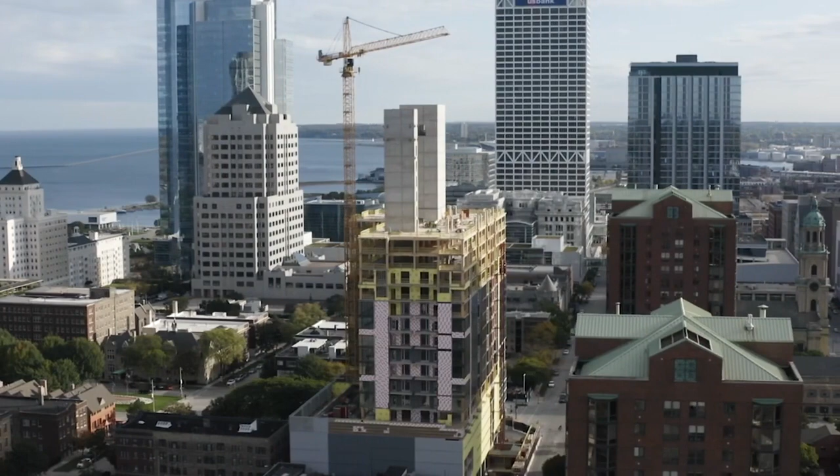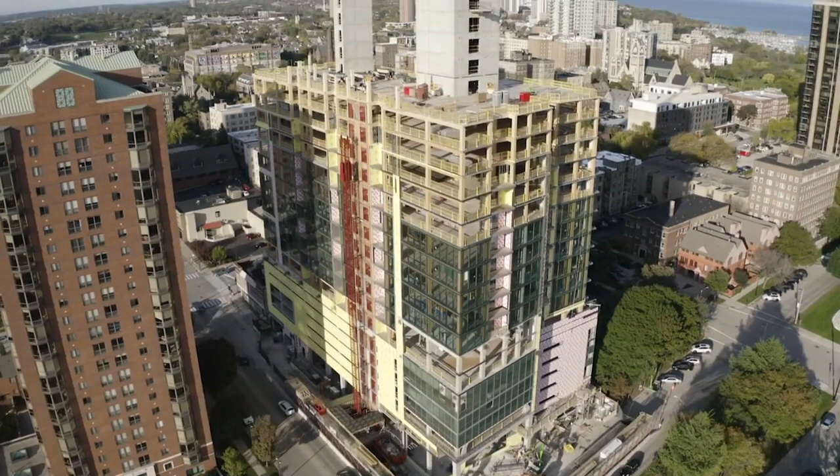In downtown Milwaukee, Wisconsin, a new luxury apartment building is rising in the upscale East Town neighborhood. The project is called Ascent, and to most passing by, it probably looks like a typical high-rise construction site. Turns out, it's anything but. To say it's very unusual is a massive understatement. Tall buildings like this are usually built out of steel and concrete, but this one? It's being built mostly out of wood.

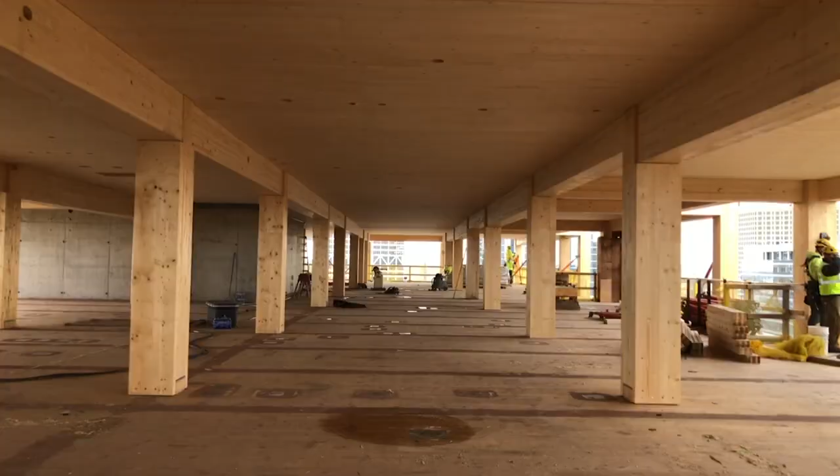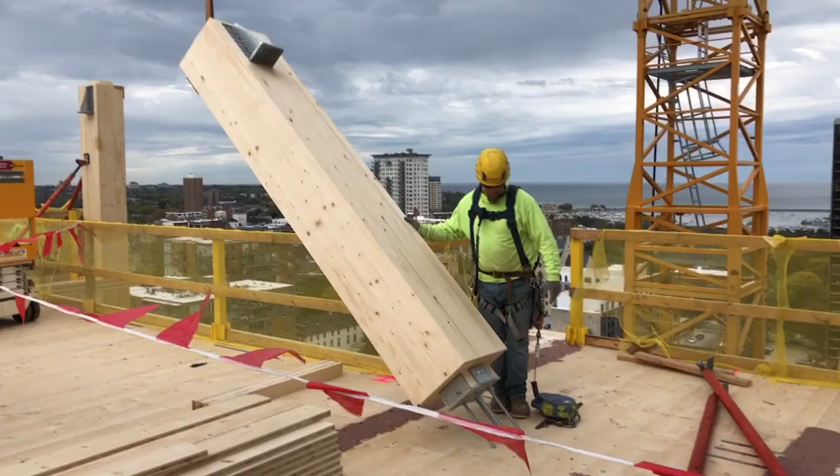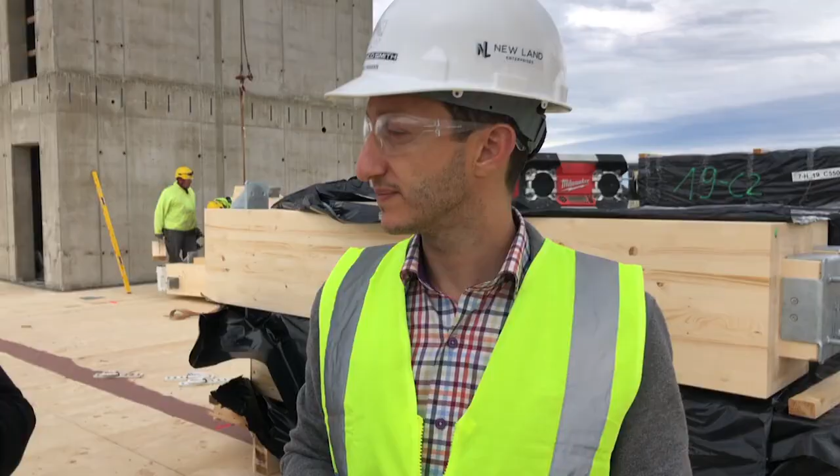How unique is this project here in the United States? Oh, it's unprecedented from an approval standpoint, from a fire testing standpoint, from a design and engineering standpoint. There was so much innovation in this project. Tim Gokhman is the managing director of New Land Enterprises, the development company behind Ascent. Building it out of timber was his idea.

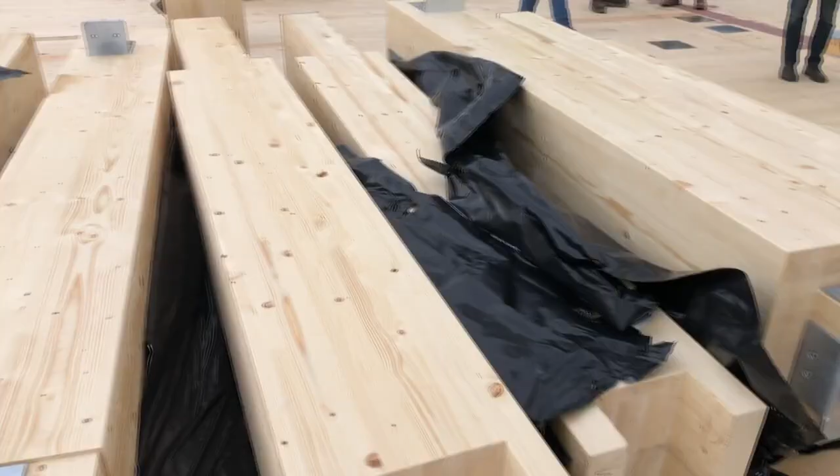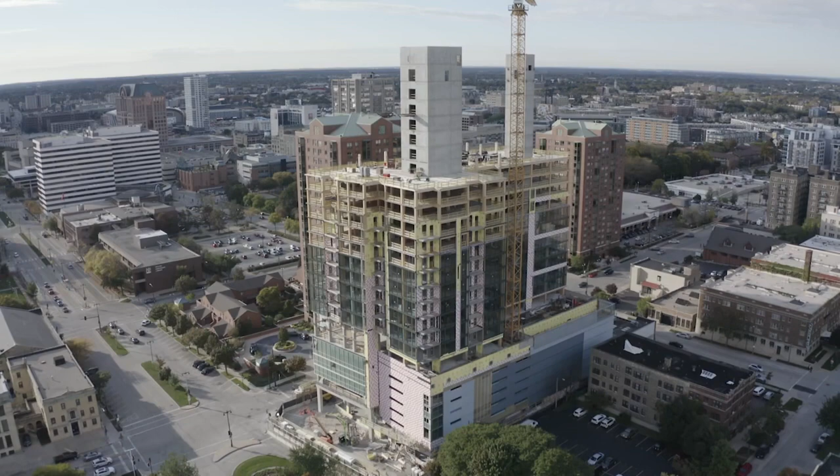Constructing with wood isn't new. We've been doing it for eons. But this uses a new technology called massive timber, or mass timber for short. Mass timber, which is surprisingly fire resistant, has made it possible to construct wood buildings that are larger and taller than ever before. In fact, when the 25-floor Ascent building is completed next summer, it will be the tallest structure of its kind in the world.

What made you say, I want to build a high-rise out of timber? Once you go into a building that has exposed wood, you understand right away. It's beautiful and you feel great in it. It is fast, it is precise, it is light, it is clean.

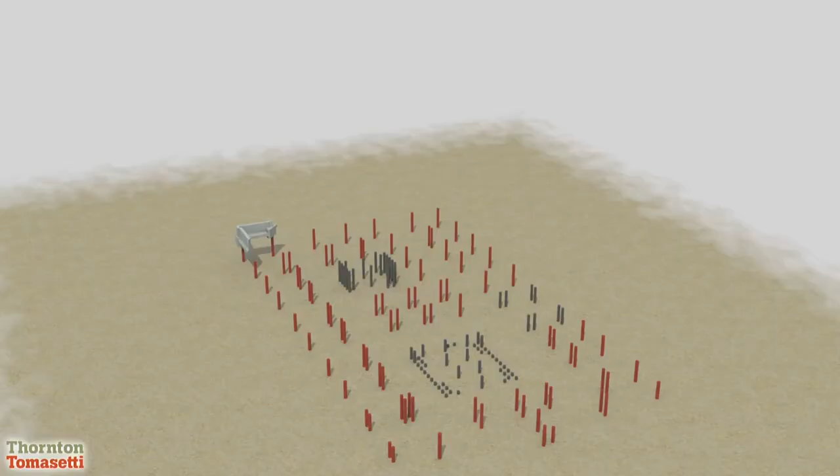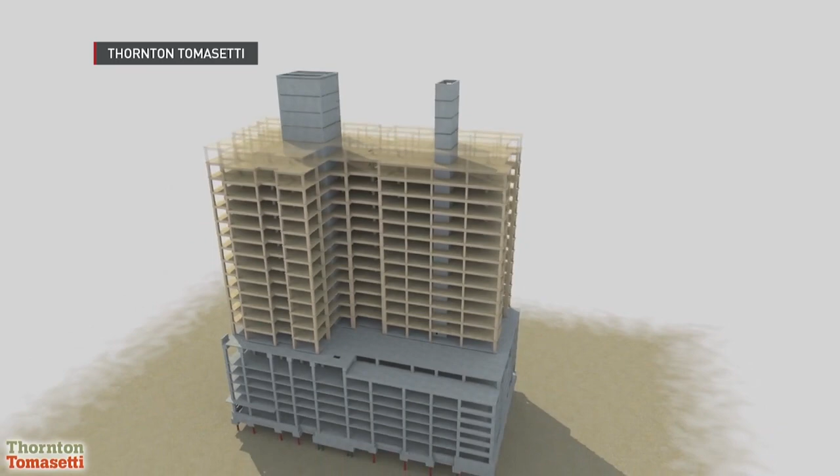The first 6 floors, which will house a parking garage and pool, are built from steel and concrete. So are the elevator shaft, stairwell, and foundation. But the 19 upper floors are constructed from gigantic mass timber beams, columns, and boards. This is relatively new, especially in the United States. It's more common in some parts of Europe, especially Scandinavia.

David Corr is a civil engineer and director of architectural engineering and design studies at Northwestern University. He's currently studying the structural properties of mass timber. So when we're talking about mass timber or tall timber, what's new here?

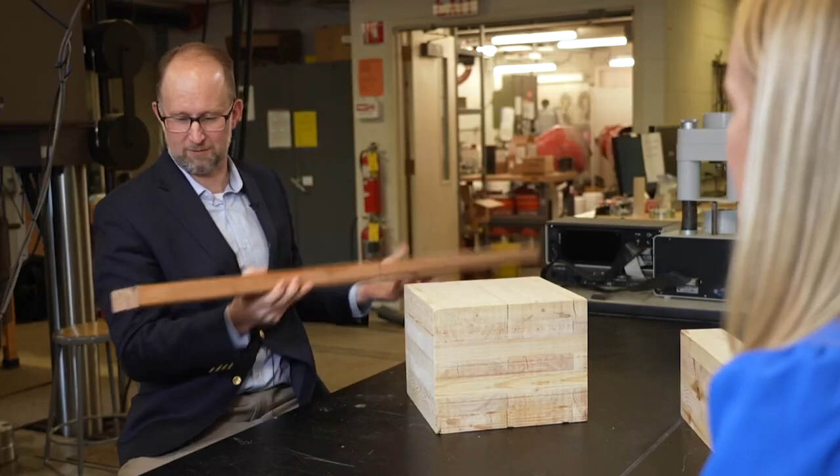This would be a 2x4. This is sort of a familiar piece of timber. If you tear down the walls of your house, you would find small pieces of wood like that behind the walls, and that's what carries all the load in your house. So this is an example of mass timber. It's important for people to understand that this is a very small part of something that would be very large.

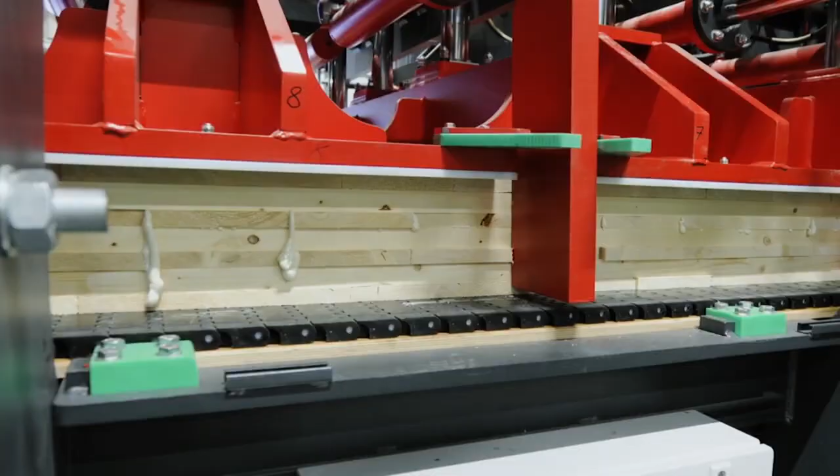So there'd be a single layer on the bottom, and then a layer of glue, and then another layer of wood. It's kind of like making a cake out of wood, where the glue is the frosting. This material is called cross-laminated timber because each layer is glued crosswise, which makes the material stronger. So it's kind of like plywood on steroids. That's exactly right. It's structural scale plywood on steroids.

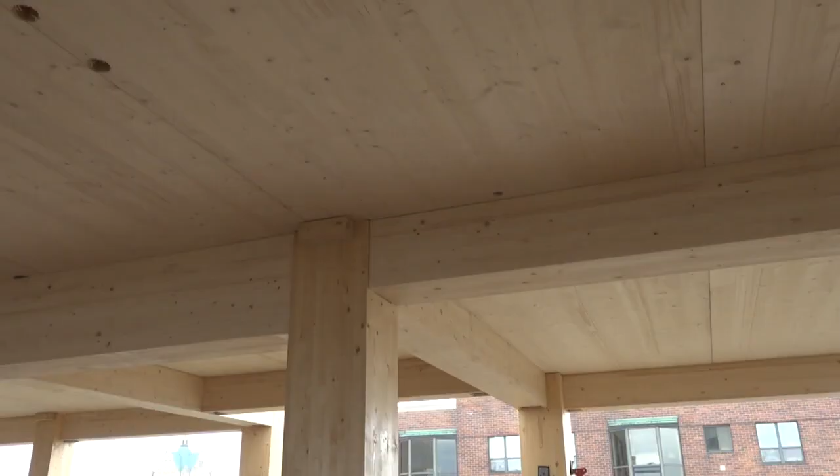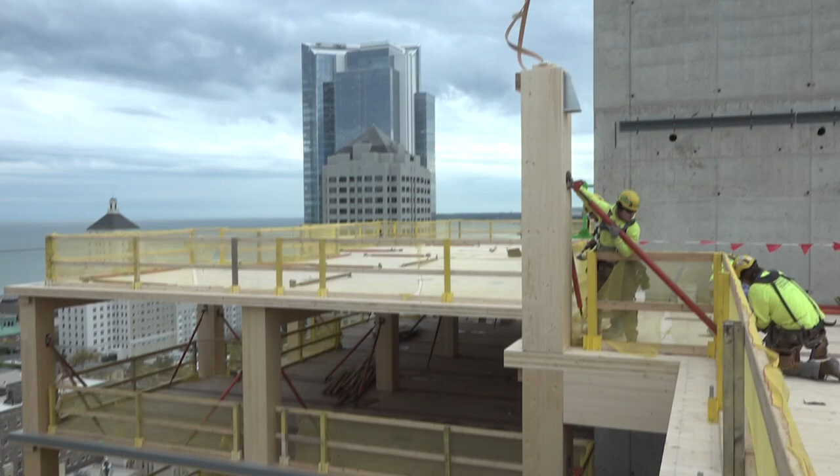These huge slabs can carry massive loads, but inch for inch, timber's not quite as strong as steel and concrete, Corr says. So it's not great for wide open floor plans with no supporting columns. And there won't be a wood skyscraper as tall as the Empire State Building anytime soon.

Mass timber was first pioneered in Austria in the 90s and is gaining popularity in the United States. In 2013, the U.S. had 26 mass timber buildings. Today, there are 576 built or under construction, and several hundred more are in the works.

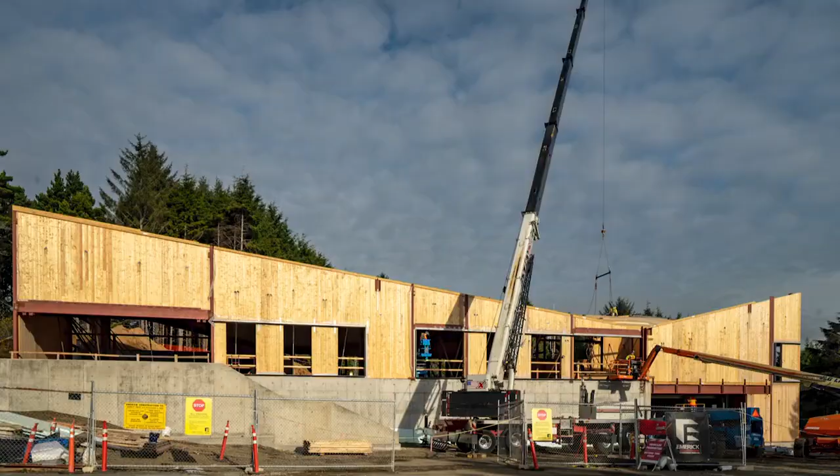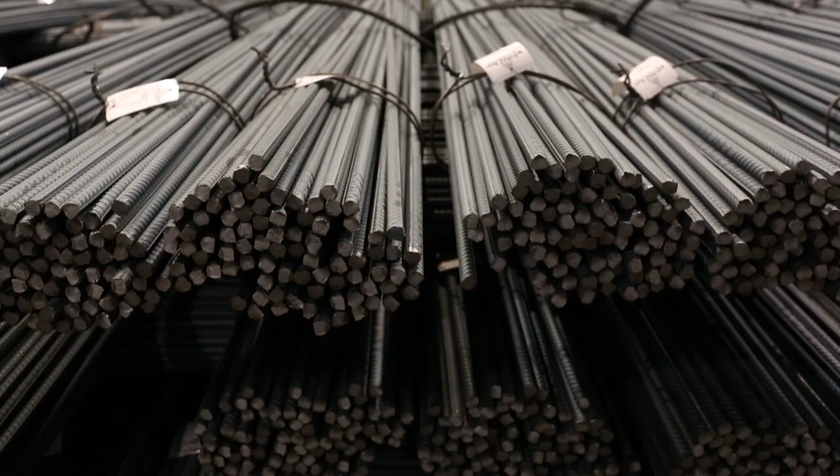There's a lot of appealing attributes to mass timber. One of them is the sustainability aspect. One of the downsides of concrete and steel is they have a lot of what's known as embodied carbon, meaning production of steel and cement is very polluting, contributing somewhere around 15% of global carbon dioxide emissions. On the other hand, trees are what's known as a carbon sink. They suck in carbon and lock it in. And studies have shown replacing steel and concrete with timber can lower a building's global warming potential.

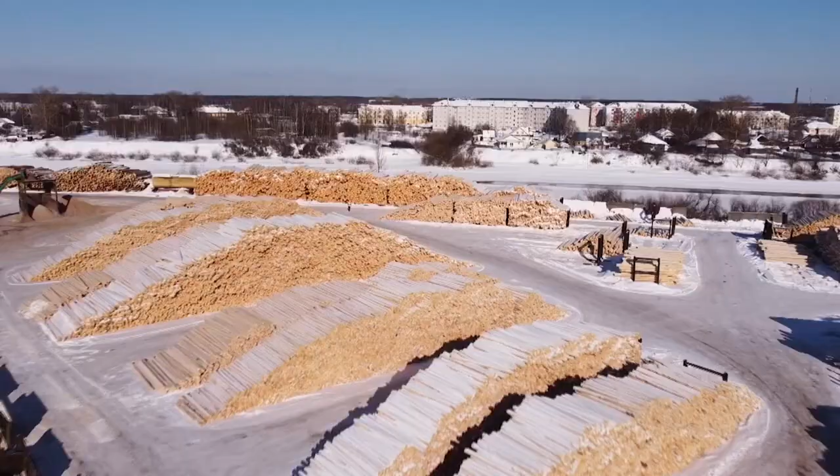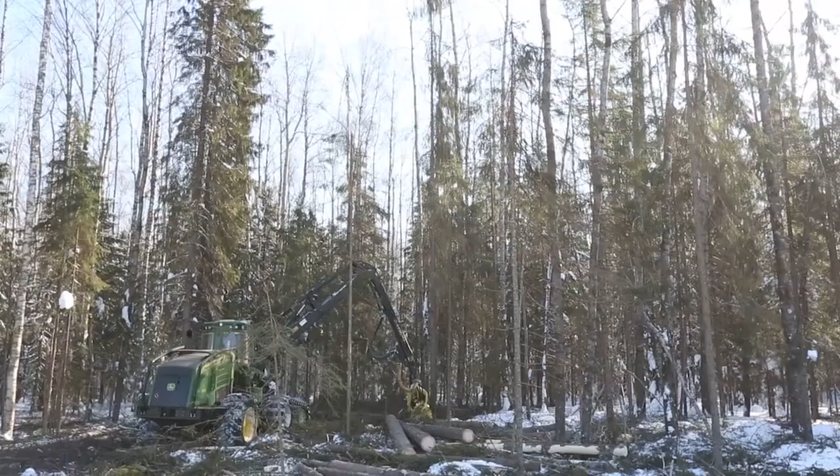But cutting down too many trees can contribute to global warming. And some environmental groups are wary of an increased demand for wood. There's still a lot of questions, and the jury is still out on whether or not it can be achieved sustainably. Kieran Kennedy directs People and Nature Policy for the Sierra Club. She worries that a logging boom could lead to the loss of a critical tool for fighting climate change, because once they're cut down, trees stop actively sucking in carbon and lose a portion of the carbon they stored. The question that we and other folks are wondering is: is there enough forested area to both sustain mass building and protect our forests?

Or are forests better left intact as a natural carbon sink? She also notes our forests are important wildlife habitats and natural buffers against flooding and erosion. So Kennedy and some other environmentalists are hesitant to embrace mass timber just yet.

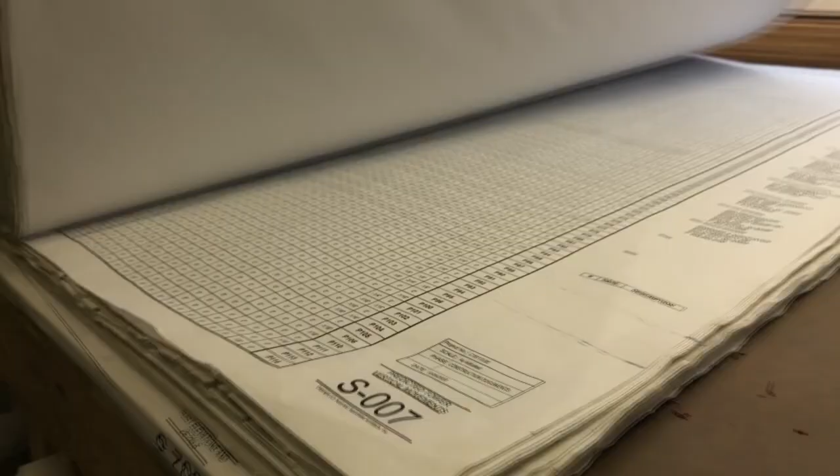This is European white spruce, so this is sustainably farmed. Jason Korb is the architect of the Ascent building. He says the team was careful to source their wood from sustainably managed forests.

Had you ever designed a timber building before? Never once. We went big. What was that process like? I think we knew about 5% of what we needed to know when we started in March of 2018. And I liken it to going to graduate school for 2 years.

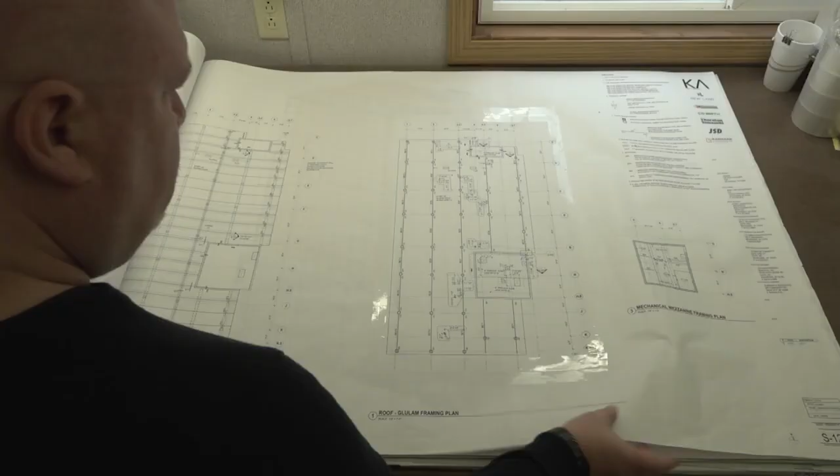Part of what Korb had to figure out was how to get the city of Milwaukee to approve his plans. The tallest mass timber buildings right now are in Europe, including the very tallest, an 18-story tower in Norway. But the tallest buildings in the U.S. are between 7 and 10 stories, in part because American building codes have been slow to catch up.

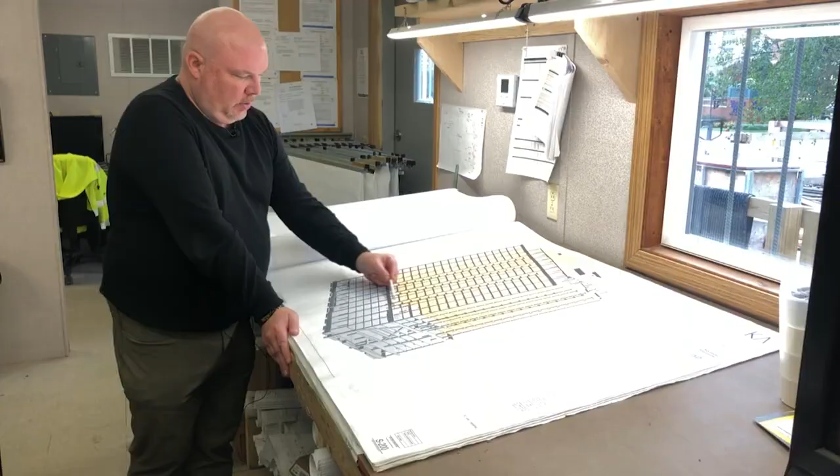Architect Jason Korb spent more than 2 years proving his 25-story building would be safe, including answering the question often on people's minds: how will the structure hold up in a fire? The Ascent team worked with the U.S. Forest Service to do extensive fire testing, the first of their kind ever conducted. 9 wood columns were burned in a furnace for 3 hours straight at temperatures reaching more than 2,000 degrees.

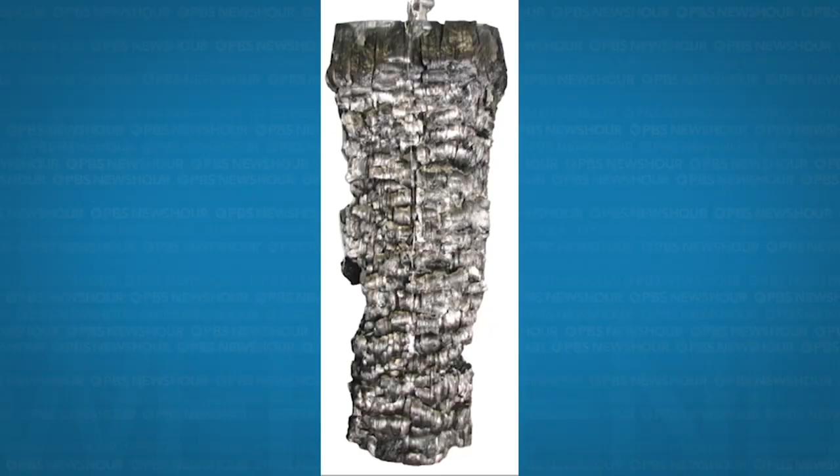Mass timber does burn. It's very different from your standard 2x4. It chars. That charring layer actually acts as insulation, protecting the rest of the wood. The Ascent columns charred and held up. The columns were designed a few inches wider to allow for this fireproofing layer. It was just one of the many new things architect Jason Korb had to do.

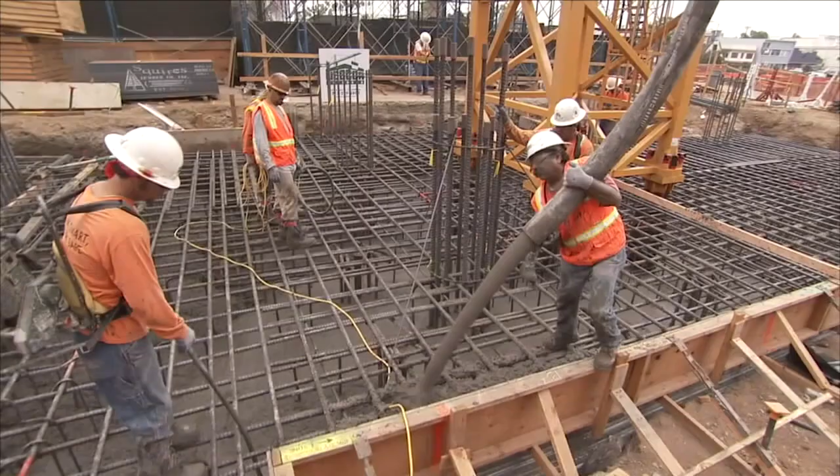The amount of pre-construction work that needs to be done in a tall timber building is pretty much like nothing we've ever seen, especially in a residential building. That's because in traditional construction, all the holes for things like plumbing, wiring, and ductwork are drilled in the steel or formed in the concrete as the building is going up. But in timber, all of that is cut beforehand.

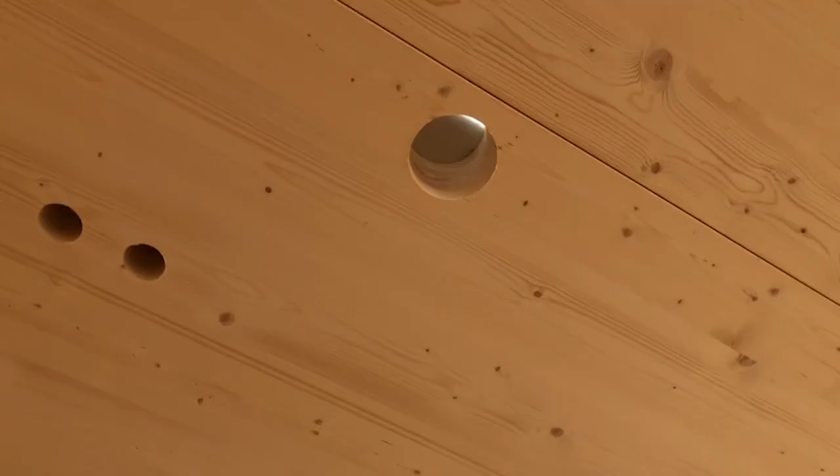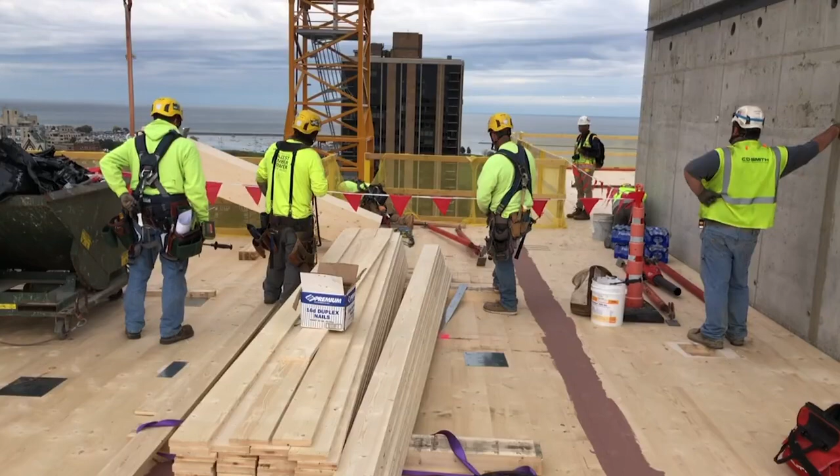So Korb and his team had to create a precise digital model. The building was modeled down to the last screw. Those files are then fed to the manufacturer, and they are laser drilled to a tolerance of about 3 millimeters. Korb says at the time it cost less to import the wood from Austria than if he bought from a North American supplier.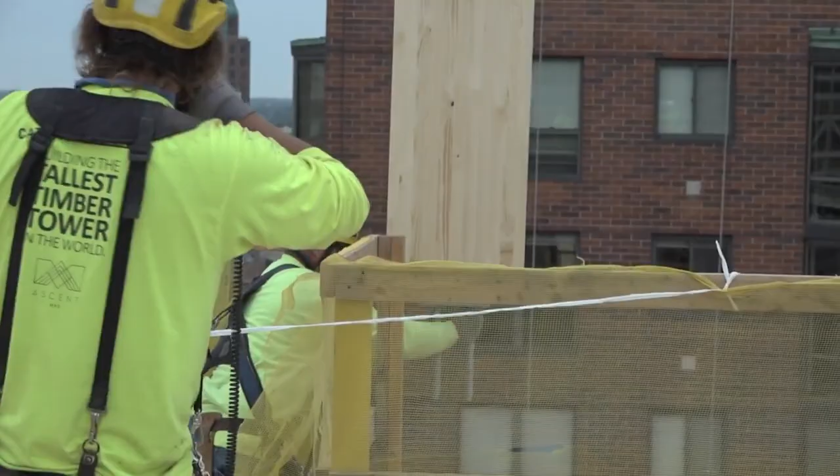So the 3,700 precisely cut pieces were shipped to Milwaukee, where the construction team is now putting them all together. And we're currently installing the columns from level 19 to 20. Chris Johansson is the project manager for C.D. Smith, the construction company building Ascent. Heads up, heads up. Each enormous column is hoisted by a crane.

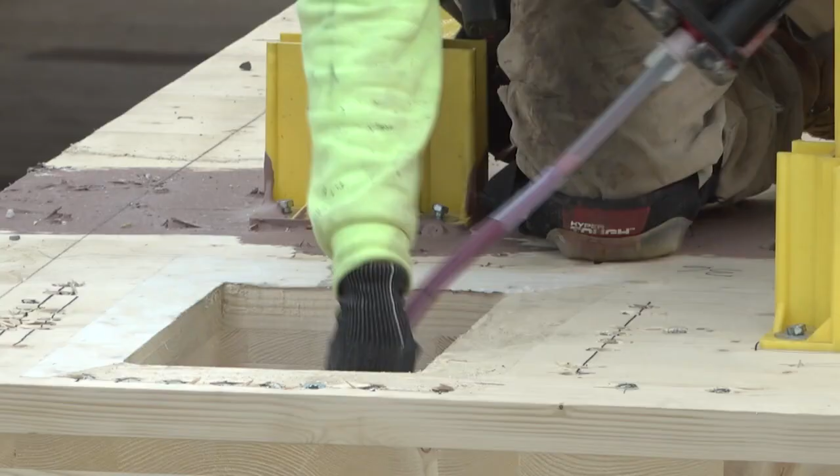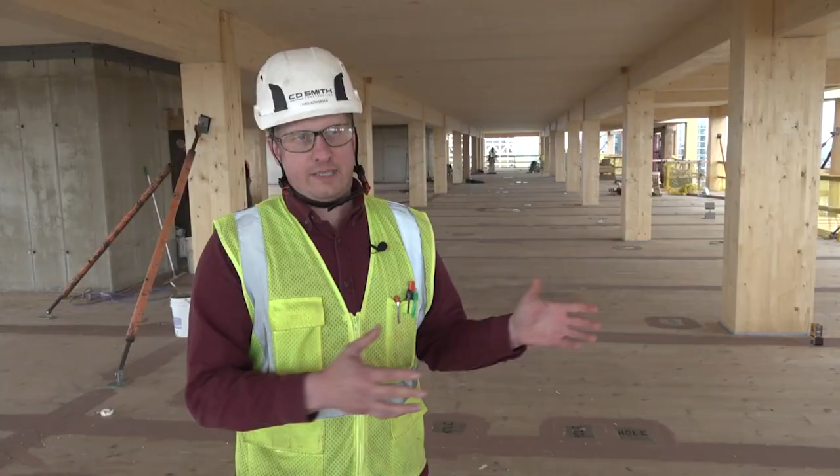Special glue is pumped into the hole. Then the column is carefully put into place. There's not one column, there's not one beam, one floor panel that is interchangeable. So we have detailed plans, a lot of color coding, and a lot of communication to ensure that we're installing things in the right place.

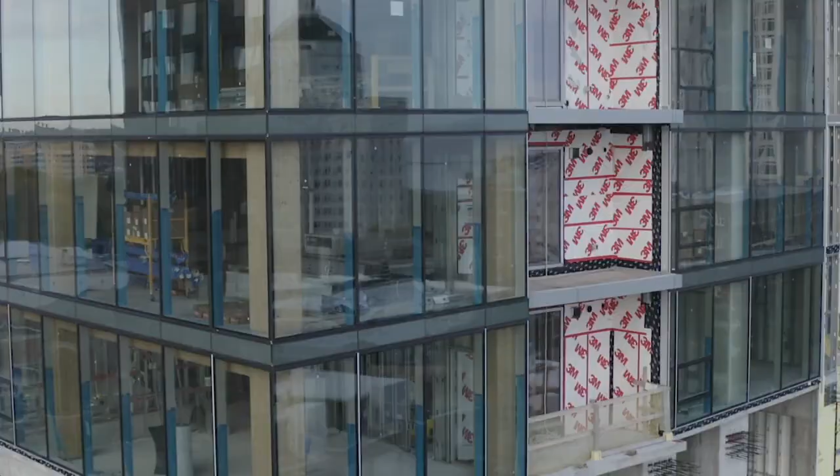All the wood is treated with a waterproof coating, and the building's glass facade will protect the timber structure inside, where about 50% of the wood will remain exposed. Any wood outside is protected by sheeting, a water-resistant sealant, and insulation.

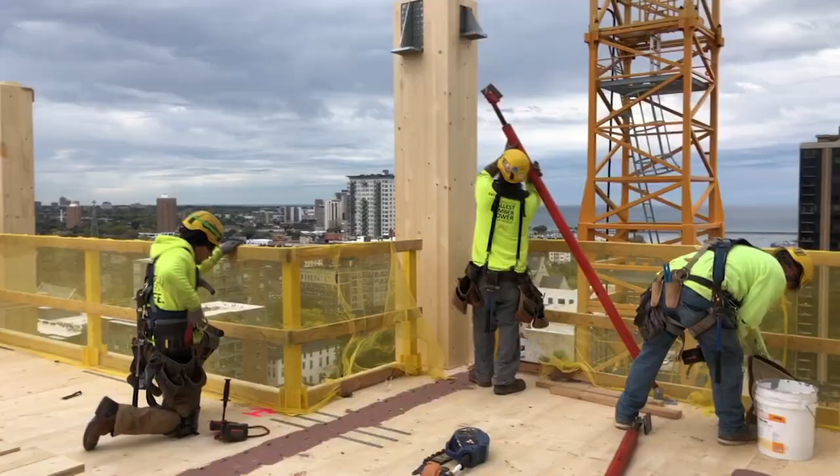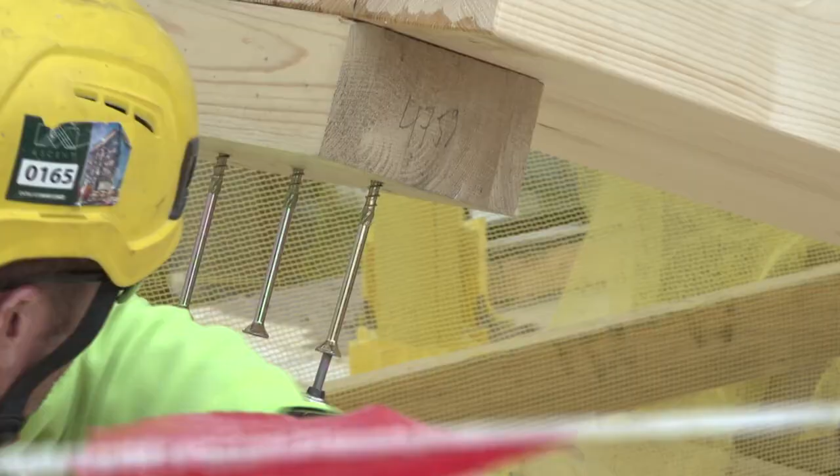Assembling the structure is comparatively quick, at least 4 months faster than if this was all steel and concrete. And Chris Johansson needs less labor for this part, about a quarter of the workers. He says the work is also much less strenuous and dirty. One of the guys told me that his wife is questioning if he's going to work because he's not coming home covered in concrete. Fewer workers and a faster job mean big savings on construction costs.

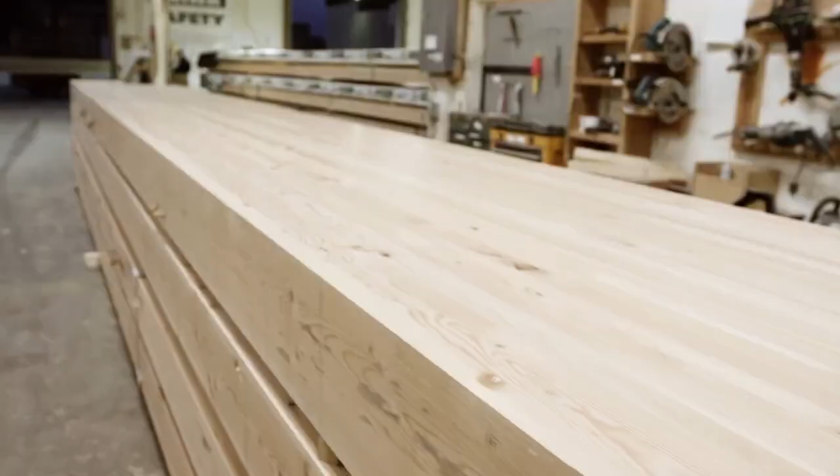But the wood itself isn't cheap. Architect Jason Korb estimates it's about 10% more than what you'd pay for concrete in Milwaukee. But that price might start coming down as the supply in the U.S. grows. The Canada-based company Structurlam opened its first U.S. plant this summer in Arkansas, a few hours from Walmart's headquarters.

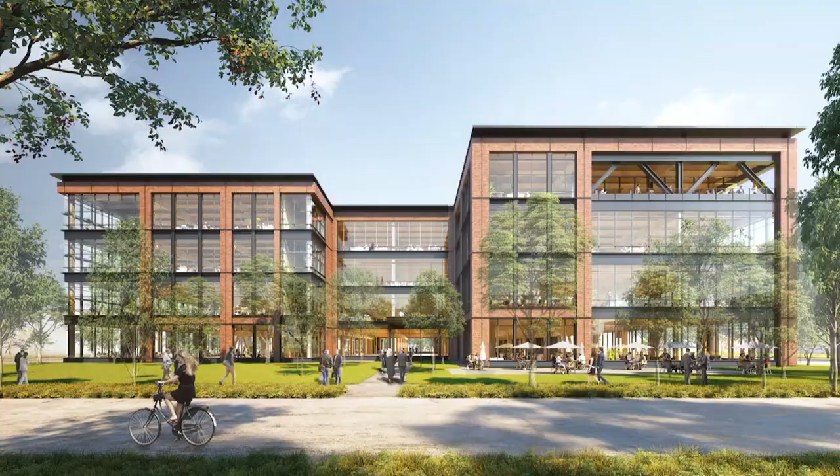That's because Walmart is building its new corporate campus out of, you guessed it, mass timber, 2.4 million square feet of office space. It's not just my hope, but my prediction is that it's a matter of time until the United States overtakes the rest of the world in production, in assembly, and in the use of buildings like this.

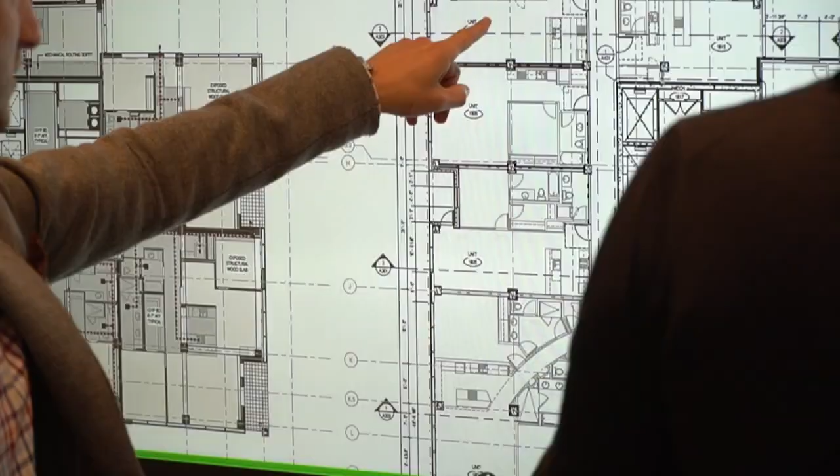From the avalanche of interest Tim Gokhman says he's gotten in Ascent, he could be right. He's already rented nearly 10% of the units. Normally, he wouldn't have even started leasing yet. Ascent is slated to open next July.